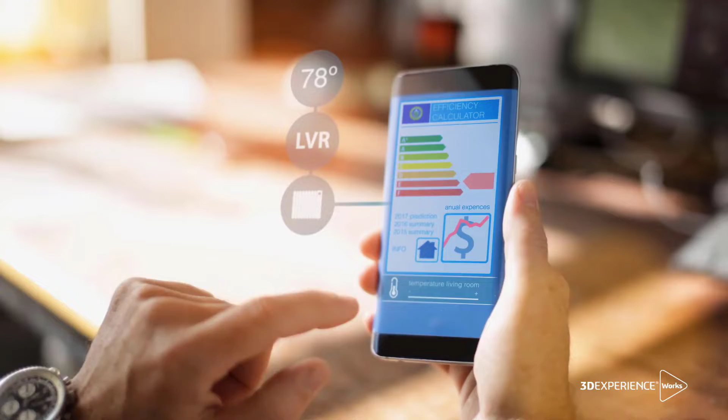We are living in the modern era of smart and connected systems, where consumers have access to a wide range of compact and complex electronic devices, which influence their daily life.

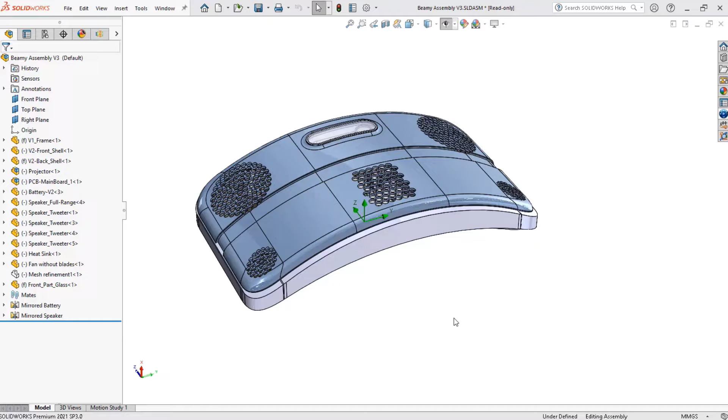Electronic device manufacturers are constantly striving to be the first in the market by innovating new products with shorter development cycles. As a result, OEMs are experiencing engineering challenges such as high-density component packaging and device thermal management while following siloed design and prototyping practices. With SolidWorks Design and 3DEXPERIENCE Works simulation portfolio, electronic device manufacturers can address these challenges easily.

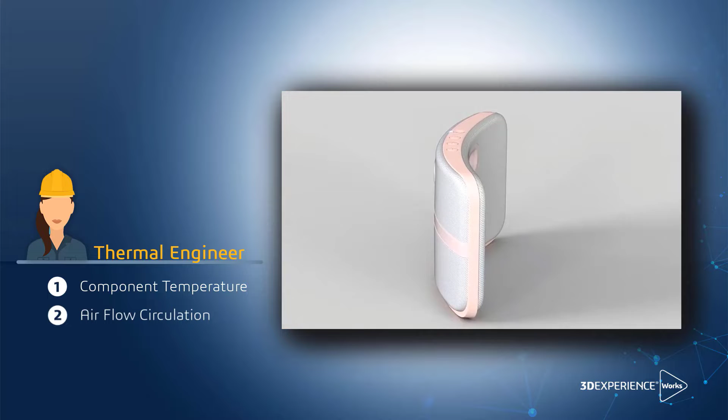Here's an example of a portable projector and speaker system called Beamy. Inside Beamy lies a projector and LED assembly, 2 speakers, 2 batteries, and an electronic subsystem. The primary objective of a thermal engineer in this case is to assess temperatures of electronic components and air circulation within the present design for a target operating condition. Based on simulation results, the engineer will introduce or enhance cooling strategies to ensure safe and efficient operation of components.

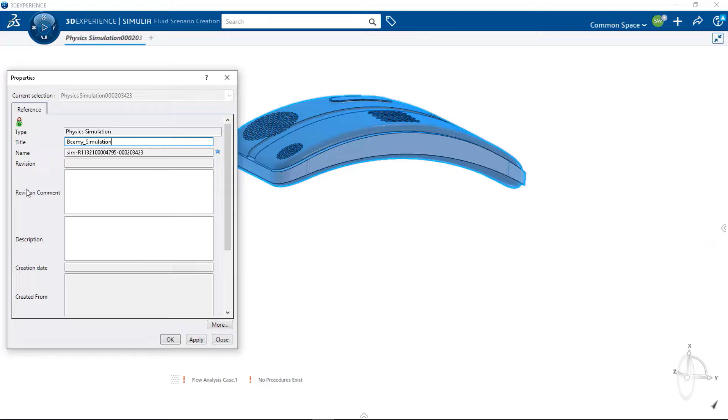Thermal engineers currently using SolidWorks for their design process can quickly assess flow and thermal performance of electronic devices by launching Fluid Dynamics Engineer role directly from SolidWorks CAD environment. Embedded in the cloud-based 3DEXPERIENCE platform, the Fluid Dynamics Engineer role offers guided interface for engineers with limited or no background in fluid dynamics simulations.

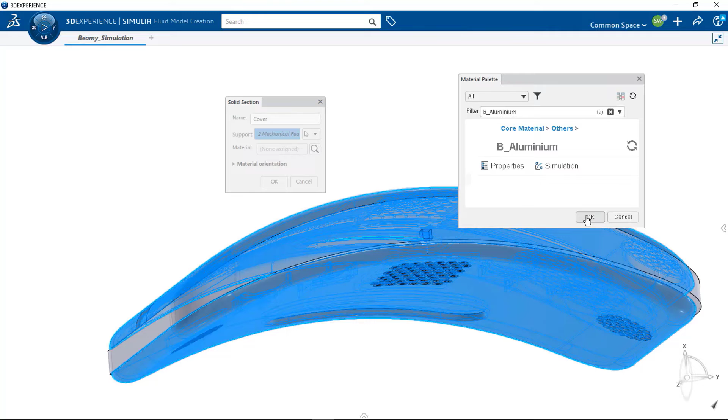Users can quickly set up conjugate heat transfer simulations directly on native SolidWorks CAD geometry with minimal interaction. Access to custom and standard material databases is made easy with a quick search in Material Palette. In case of Beamy, a steady-state incompressible simulation is defined to model conjugate heat transfer with radiation phenomena. Additionally, solid physics is enabled to capture conduction and radiation effects.

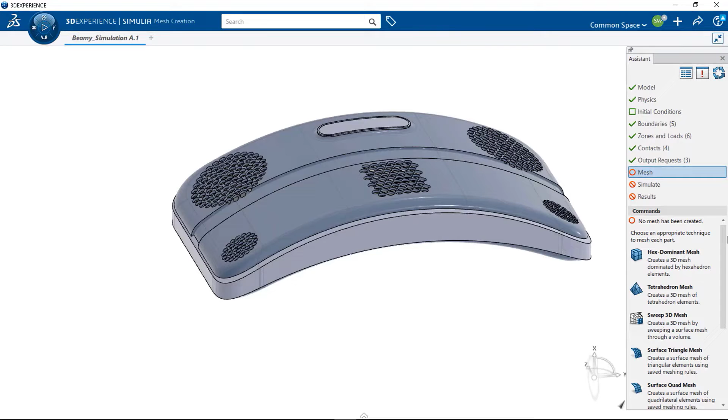The Fluid Dynamics Engineer role offers a comprehensive suite of solid and fluid meshing capabilities, allowing engineers to easily mesh large and complex geometries with minimal user interactions. Hex-dominant meshing technology enables automatic extraction of fluid volume and generation of body-fitted volume mesh with boundary layer elements. Abaqus-based sweep and tetrahedral element types are offered for meshing solid geometries efficiently.

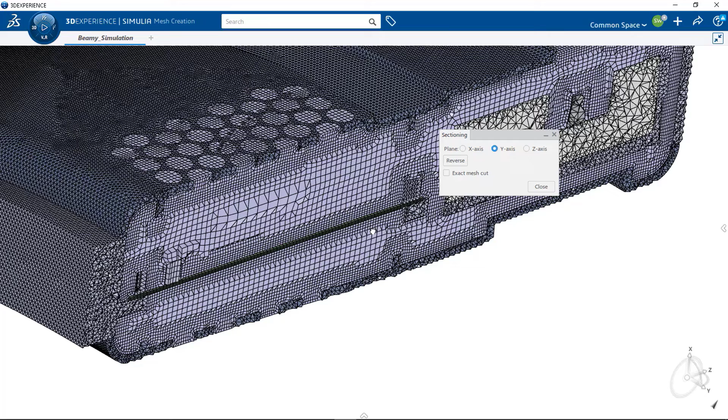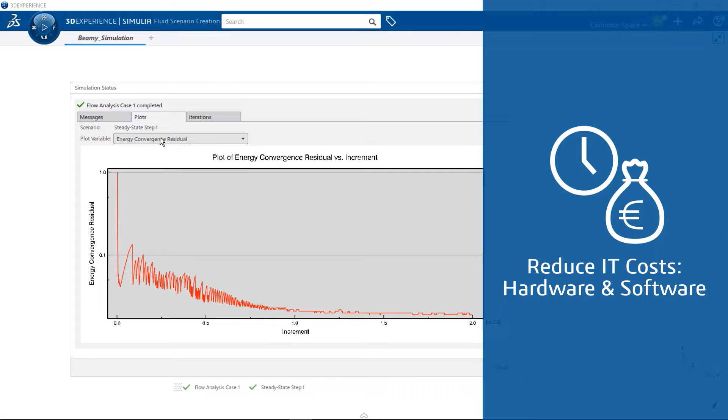In this case, the thermal engineer is able to generate a mesh size of 9 million elements in a matter of minutes. The high-fidelity mesh generated in this process can accurately capture intricate thermal interactions between air and electronic components inside Beamy. Engineers can leverage cloud-based high-performance computing to solve large thermal simulations, which could be quite challenging for local workstations. This helps electronic device manufacturers, especially startups, to reduce IT infrastructure costs needed for large complex simulations.

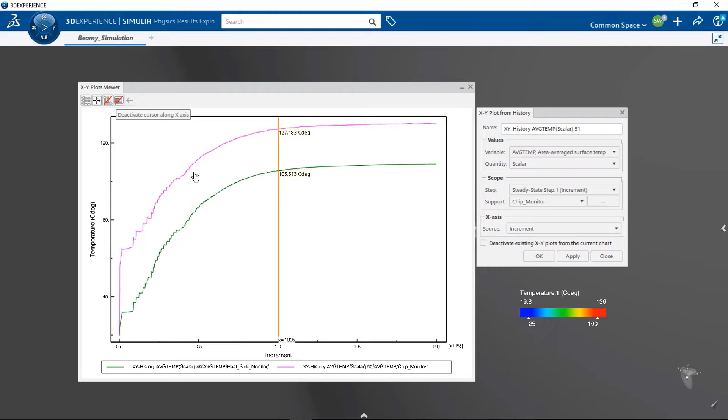A high-performance visualization engine enables extremely insightful information about 3D flow distribution and thermal performance to drive design improvement decisions. XY history plots and sensors allow engineers to gain confidence in the convergence of KPI values, such as surface average temperature of the heat sink above the chip. In this case, simulation results are indicating potential meltdown or failure of the chip and heat sink, since their operating temperatures are way higher than the acceptable limit of 80 degrees centigrade.

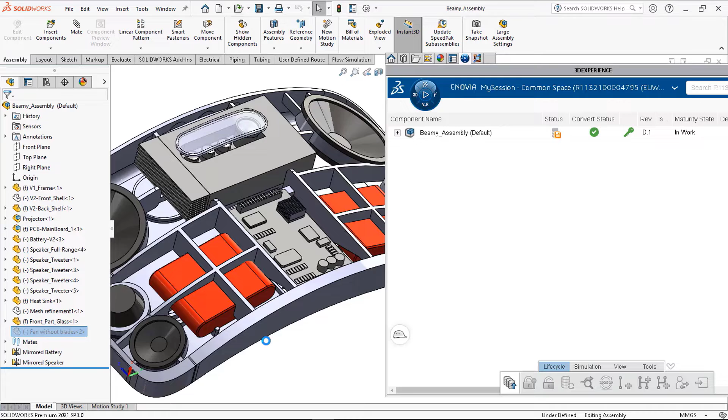Harnessing the power of CAD and PLM embedded simulation environments, the engineer is able to go back to the SolidWorks desktop, explore a direct cooling strategy by placing an internal fan opposite to the heat sink in order to take away more heat from the fins and chip surfaces, and seamlessly update the simulation model for revised SolidWorks CAD in the 3DEXPERIENCE platform.

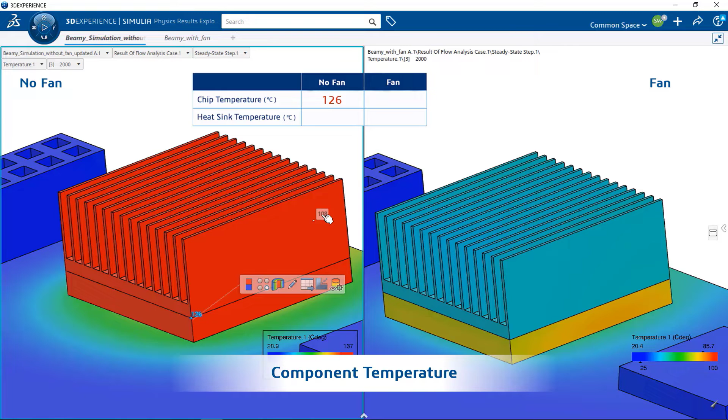Temperature profiles and flow patterns are easily compared side by side with intuitive post-processing capabilities. The revised design with the fan appears to have cooled the heatsink and chip sufficiently below the failure point of 80 degrees Celsius, thus increasing thermal factor of safety for the device. As a result, engineers are able to confidently make design improvements upfront in the development process and cut down rework and prototyping costs.

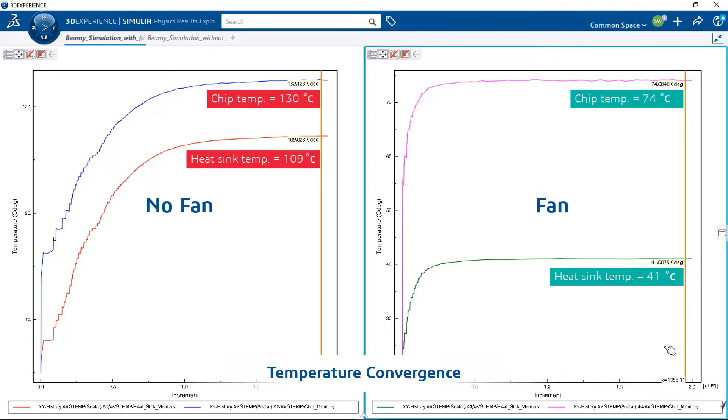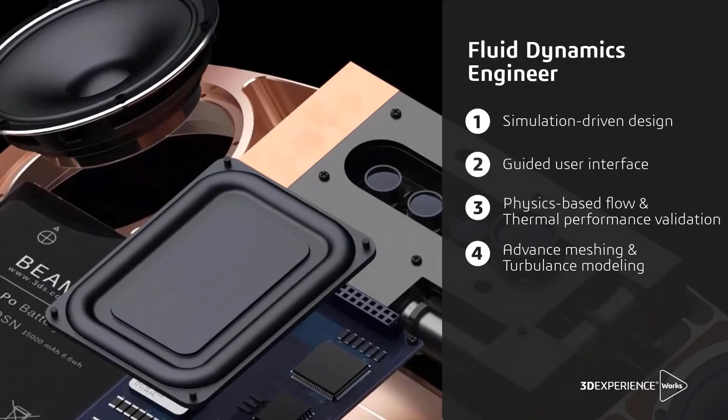With Simulia's Fluid Dynamics Engineer role included in the 3DEXPERIENCE Works portfolio, product designers and thermal engineers can quickly explore, validate, and enhance thermal management of complex electronic devices while leveraging the power of the cloud-based 3DEXPERIENCE platform.